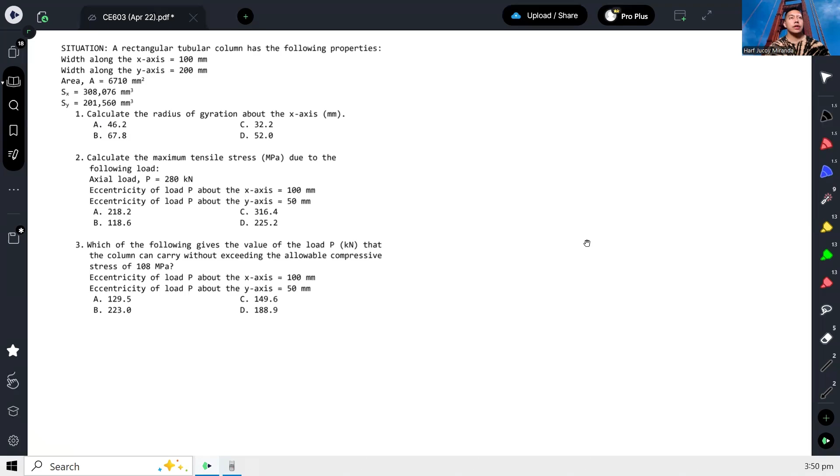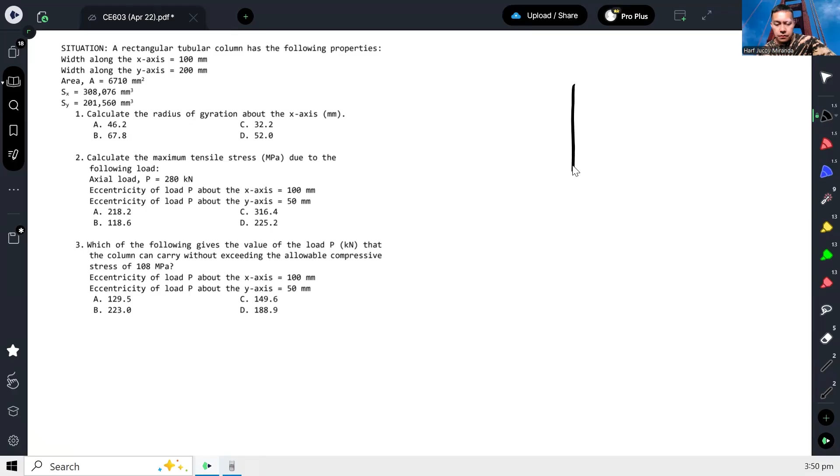For the first question, calculate the radius of gyration about the x-axis. So let's draw the rectangular tubular column. Okay, and let's say this is the x-axis, let's say this is the y-axis.

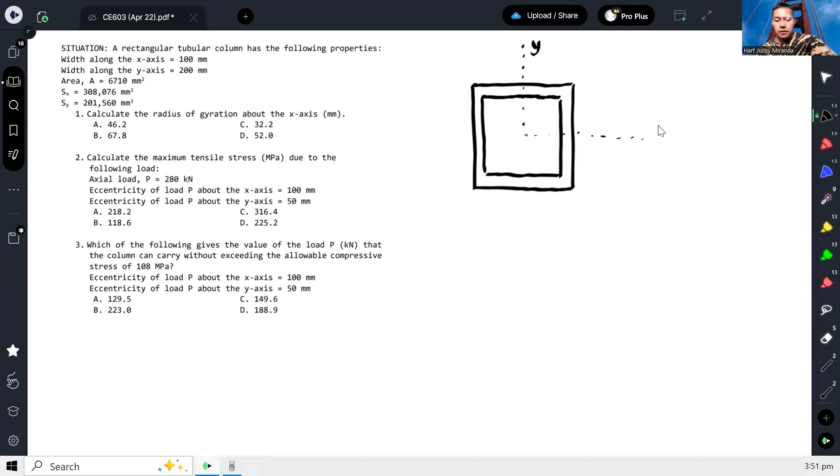The width along the x-axis, so that's 100. Then the width along, take note, along the axis she said - meaning you are measuring it along that axis. So that's 200. Then given naman is the area.

So her first question, what is Rx? Well, of course, Rx is just the square root of Ix over area. There's the area, the problem is, Ix is not given. What's given is the elastic section modulus. The elastic section modulus, it is defined as I over C.

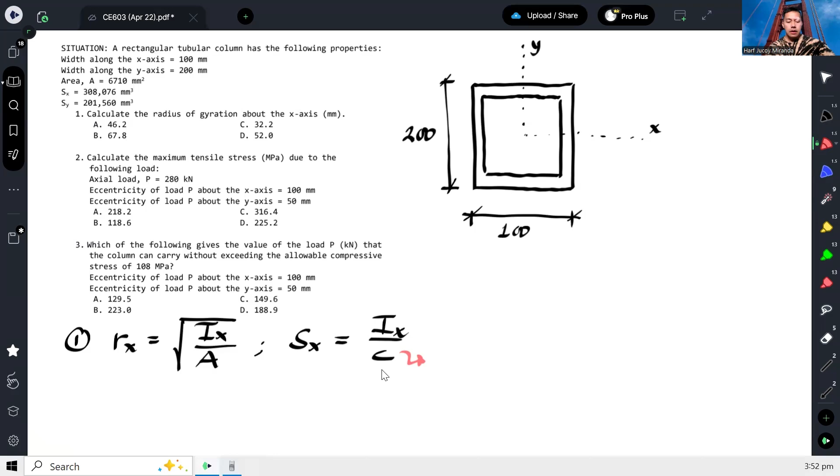So of course, since that's Sx, this is Ix. But what is C? How is C measured? Take note, guys, that C is measured as the extreme fiber distance.

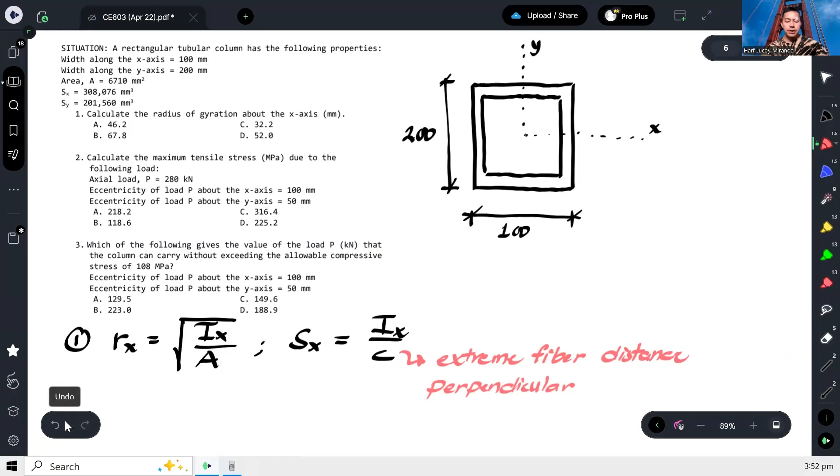Or should I say, measured perpendicular, another way of saying it is extreme fiber distance from the neutral axis. Measured perpendicular from the neutral axis, or from the axis of bending.

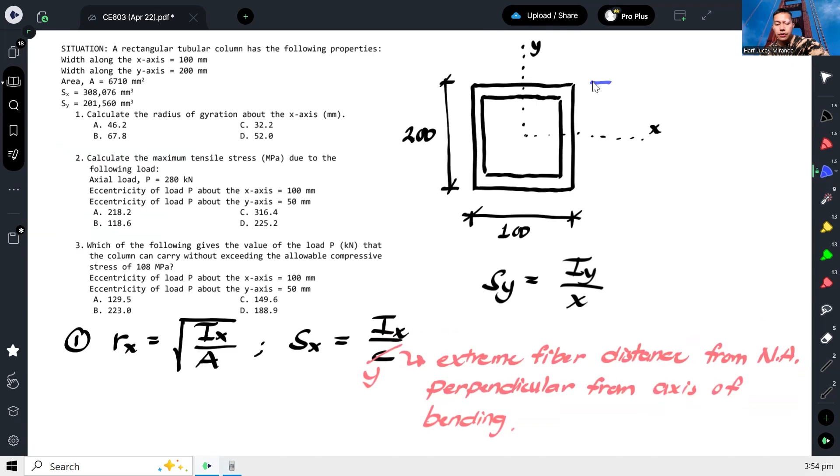So anyway, the Y we're referring to now, since this is rectangular, this is it - that's what becomes our C, which is just 100, half of 200. So therefore, we are now ready to solve for Rx.

So our Rx is just the square root of Sx times Y, which is 100, over area - wait, sorry, it's not divide. What is this? This is Ix. So it's multiply, because we need to cross multiply to get the value for Ix.

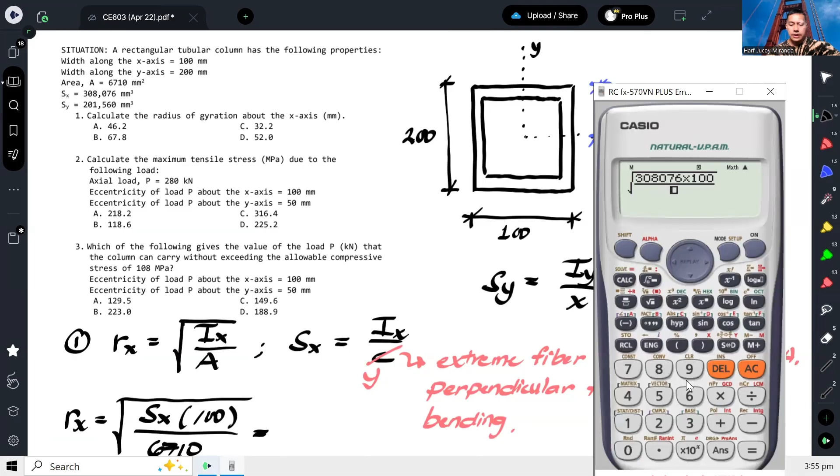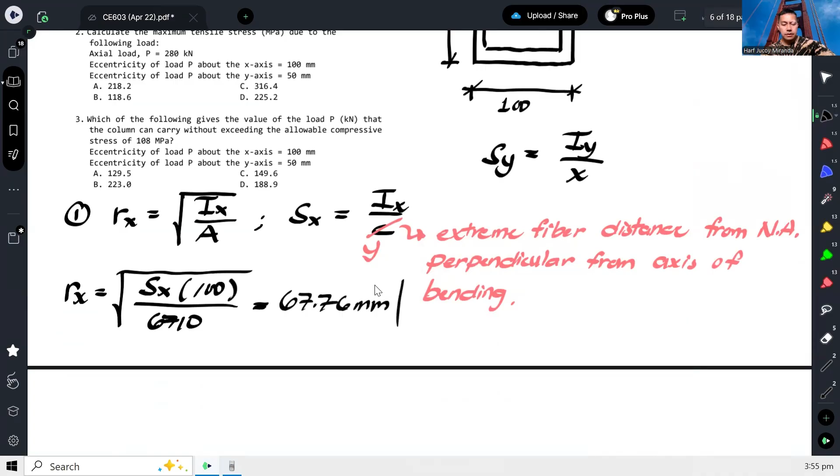So we have square root of 308,076 times 100 over the area, 6710. So that is 67.76 millimeters. And that would be letter B.

Next, calculate the maximum tensile stress due to the following load: axial load of 280 kilonewtons, eccentricity of the load P about the x-axis is 100, and then eccentricity about the y-axis is 50.

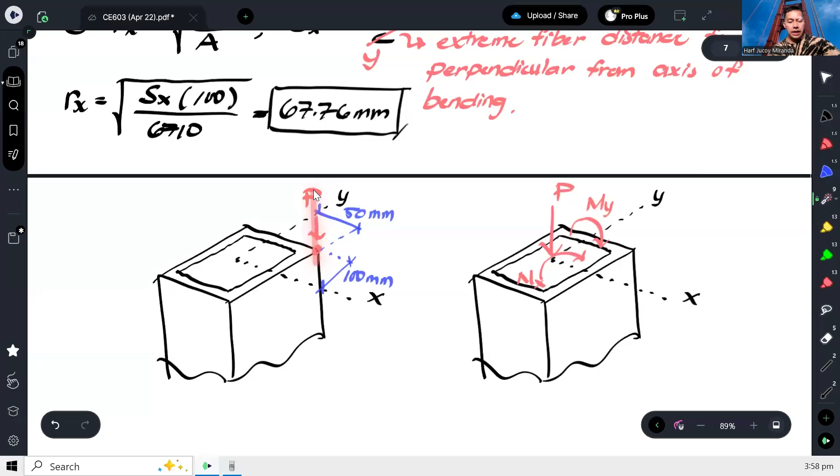So as you can see, on this side, if we just look at Mx, this upper portion will be under compression, while the bottom portion will be under tension. If we just look at the bending moment about y, this right side portion will be under compression - wherever the arrow points, that's the compression side. Then this left side will be under tension. So as you can see, there's a common side where both are tension - this side right here.

Dito, that will be under tension. At of course, alam natin from bending stresses na pinakamalaki yung stress sa pinakamalayong fiber. At ang pinakamalayong fiber, hindi ba ito? Okay, kaya dito, ina-expect natin potentially magkakaroon ng tensile stress, no? So lagyan natin ng note, no? Bali dito is the location of potential.

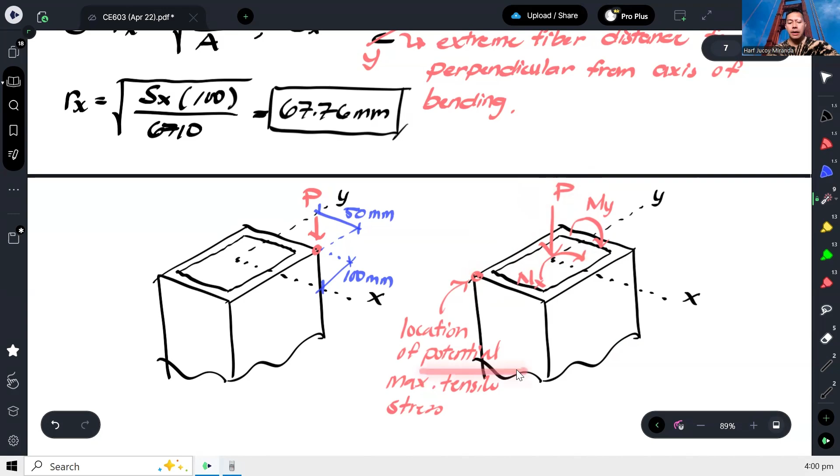Maximum tensile stress. Sinabi ko lang na potential, no? Kasi it is also possible na walang madidevelop na tensile stress. Ibig sabihin, compression pa rin lahat, kasi dahil dito. Pwede kasi na oo, merong effect ng tension tong moment, pero i-combine pa natin yan dito eh, dito na compression. Kaya it is also possible. Kaya sinabi ko lang potential, no? But anyway, so tingnan natin.

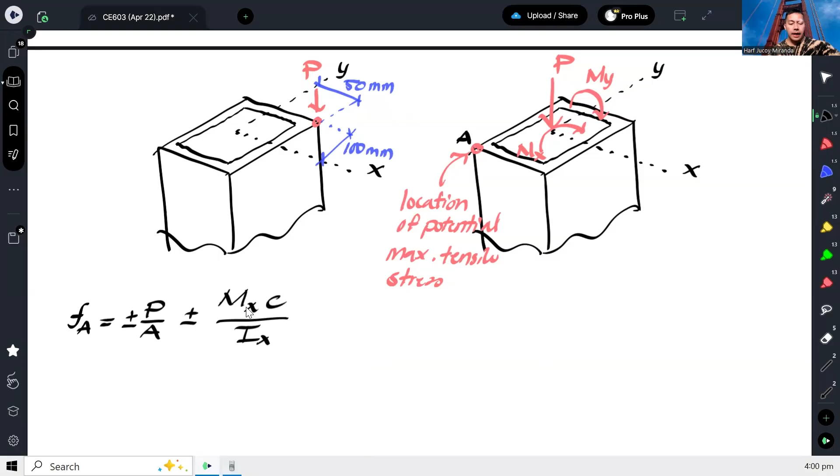So tawagin natin ito na point A. Let's calculate the stress at point A. Dito, of course, gagamit tayo ng combined axial and moment na formula. So that is, sa axial stress, that is P over A plus or minus, tapos meron tayo ngayong MC over I, kaya lang yung M natin dalawa. Meron tayong MX C over IX. Itong C na to, kapag X yung moment, dapat Y yan. Okay? At kapag naman Y yung moment, yung C na to will be X. Na? Diniscuss na natin yung kanina.

Pero, luckily, ang given nga ay elastic section modulus. Kaya instead na MC over I ang gamitin natin, sulat ko muna: MY CX over IX. So instead na yun ang gamitin natin, pwede natin gamitin na M over S. Ayan, pwedeng ganyan. Okay? So again, valid ito only if you are referring to extreme fibers, which is in this case, itong A na to is in the extreme fiber. Kapag hindi yan extreme fiber, hindi mo to pwedeng gamitin. Instead, ang gagamitin mo MC over I, tapos yung C, define mo kung saang fiber siya.

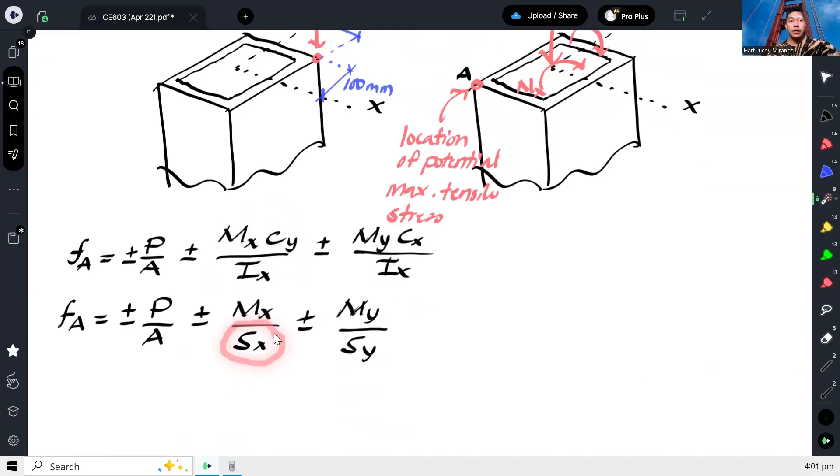For example, itong fiber na to, hindi naman yan extreme fiber dun sa x-axis, kaya meron siyang distance C na hindi maximum. Okay? Kasi ulitin ko lang, itong elastic section modulus ay sinusukat mo yan or kinocompute mo yan based on the extreme fiber location. Kaya nga ito ay C, yan, extreme fiber distance.

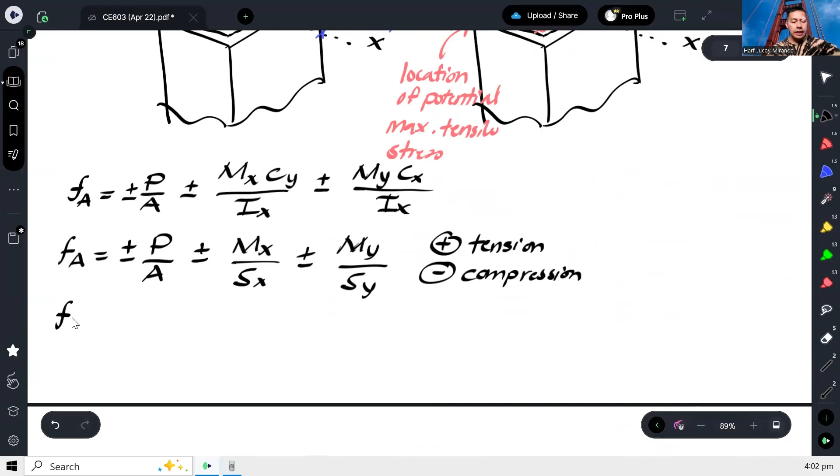Anyway, let's calculate. Ang sign convention po natin dito is kapag positive is tension, negative is compression. Yun yung default na sign convention sa combined axial and bending, so sundin na lang natin. So una, yung P ay compression, so negative. Yung P na in-apply, 280, gawin natin Newton, over area, ang area natin ay 6,710. Okay? Tapos MX over SX.

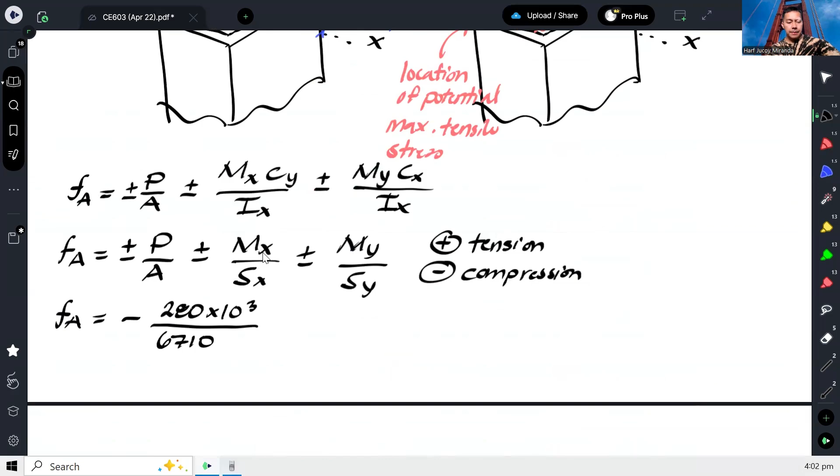So ito, tension naman yung natin. Sa point A, ang effect ng moment about x ay tension, so positive. So MX, paano nga pala kumpitin yung MX? Ang MX ay yung P times yung eccentricity natin along the y or about the x-axis.

Okay, so ang ginamit ko na term along, kaparehas lang din yan sa eccentricity about the x-axis. Pag sinabing along, sinusukat mo siya dun sa axis na yon. So in this case, ito yon. Okay, ito yung 100. So ito yung sinabi sa problem na eccentricity about the x-axis, parehas lang yun sa along the y-axis.

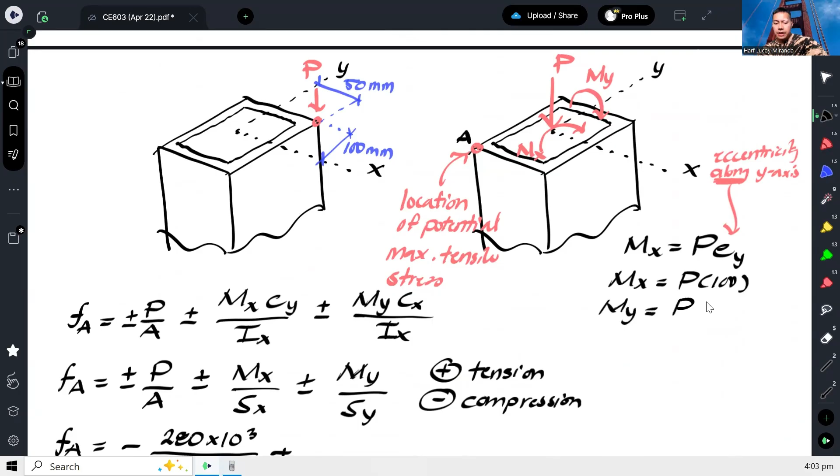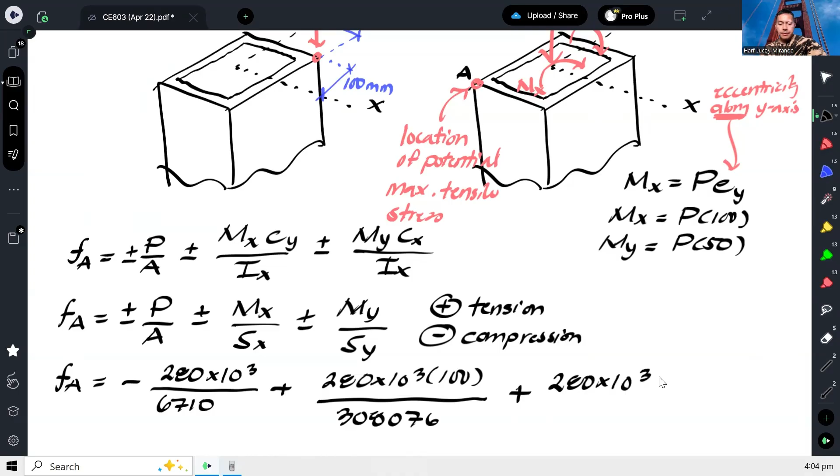Okay, so anyway, that is MX equals P times 100. Tapos yung MY naman is P times 50. We have 280, yun yung P, times 100, moment na yan, no? Over SX. Yung SX natin ay 308076. Okay? And then, para naman doon sa MY, so plus ulit kasi tension, 280 times 50 over SY is 201,560.

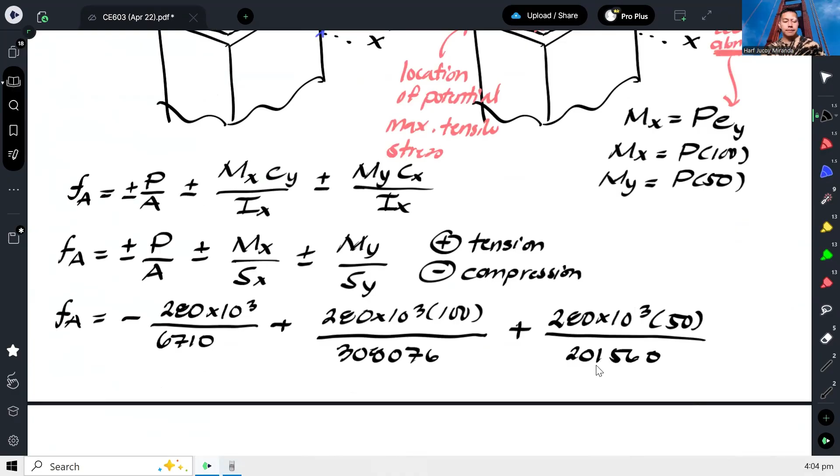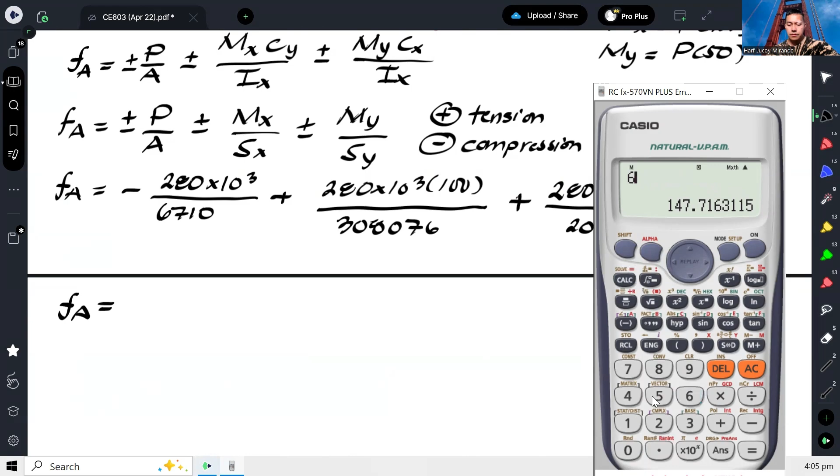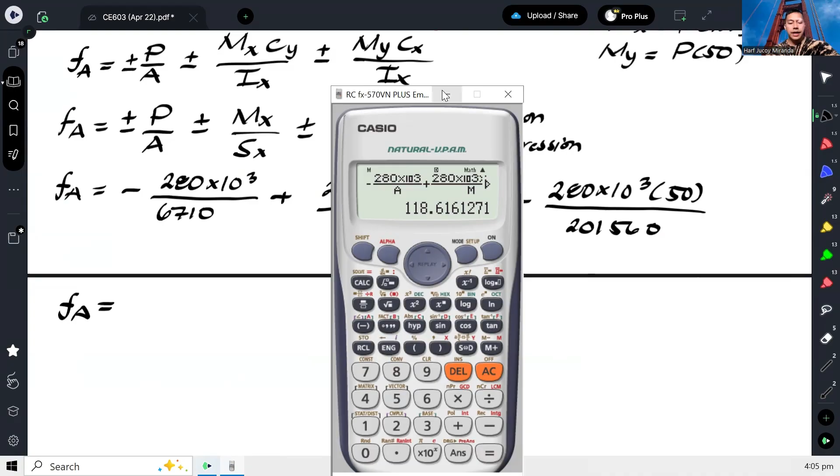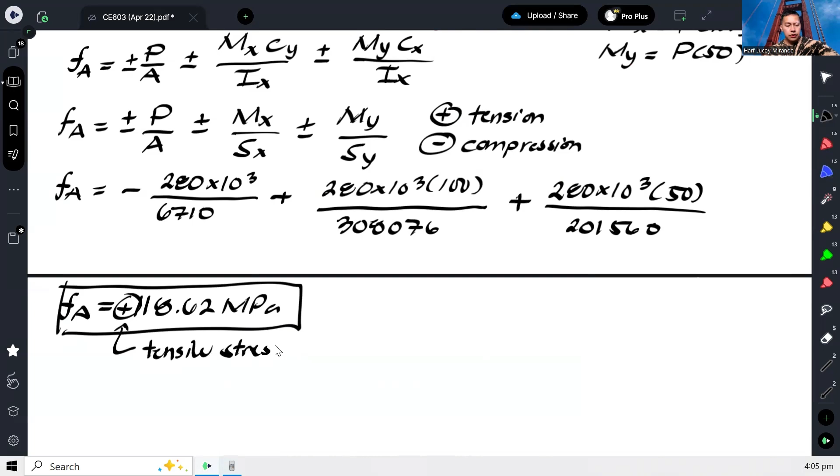Ayan, and let's just calculate. Kapag nag-positive ito, ibig sabihin tension yung stress doon sa A. Kapag nag-negative, ibig sabihin compression pa rin, so in short, walang tensile stress. Okay, and that gives us positive 118.62 megapascals. Positive indicates that this is in tension. So this will be our answer. Okay? So that would be letter B.

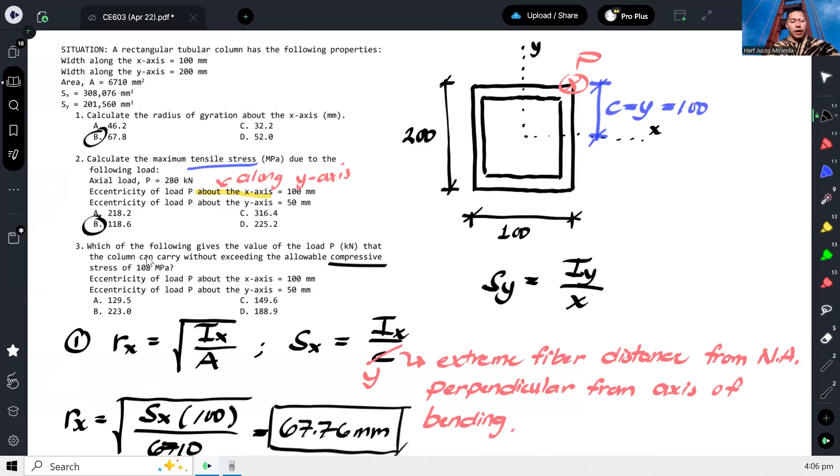Okay, next. Which of the following gives the value of P that the column can carry without exceeding the allowable compressive stress of 100 megapascal? So ngayon, isipin naman natin, saan ba mangyayari yung maximum compressive stress? Actually, opposite lang nung point A. Kasi kung dito nangyari yung tensile stress, dito naman mangyayari yung compressive, maximum compressive. Kasi parehas na effect nung moment dito sa point na to is compression, plus ito pa. So yun yung maximum compressive stress.

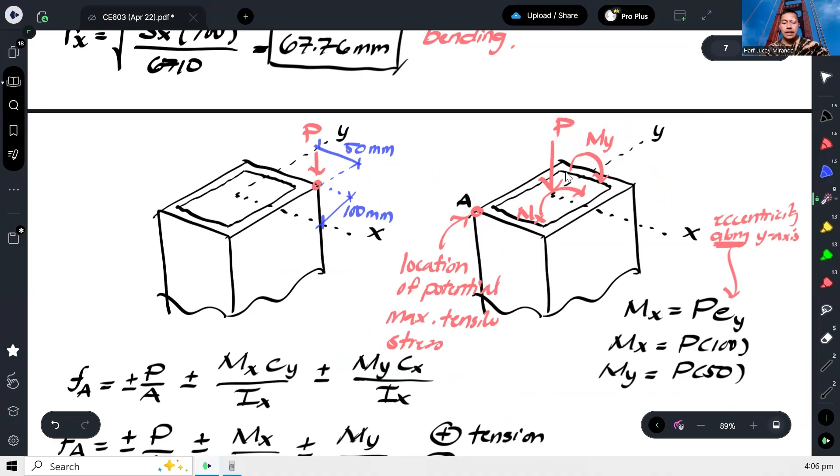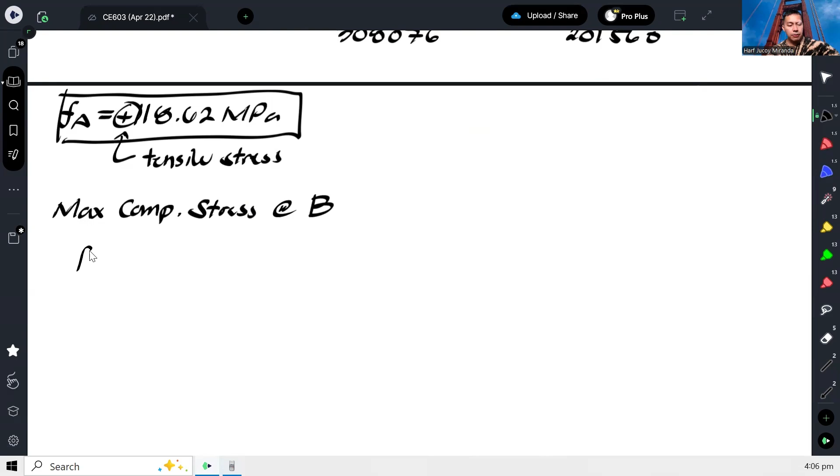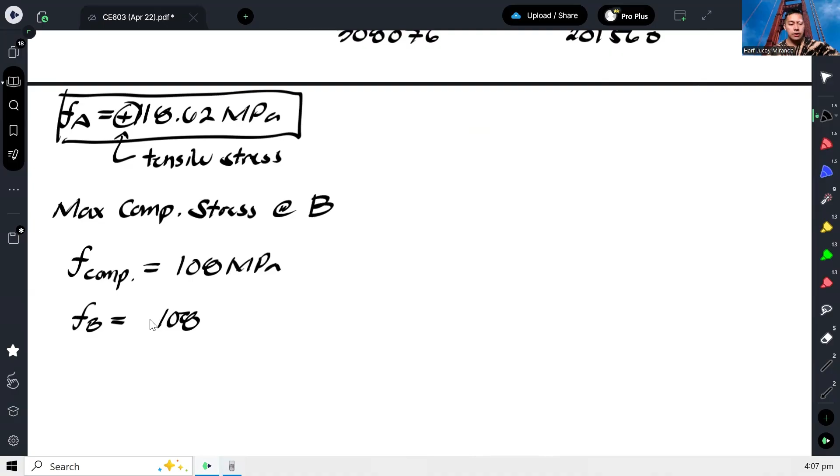So nandito sa point B, no? So max compressive stress is at point B. So ano daw dapat yung minimum na stress or ano yung maximum pala na compressive stress? That is 100 megapascal. Ibig sabihin, isa-set natin na yung stress sa B ay 100 megapascal. Pero take note, no? Compression ito, so gagawin natin negative. Okay? Kasi negative yung compression natin.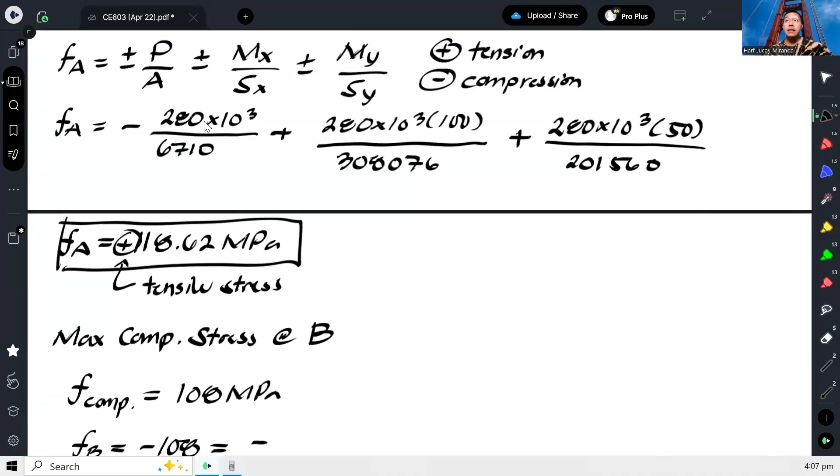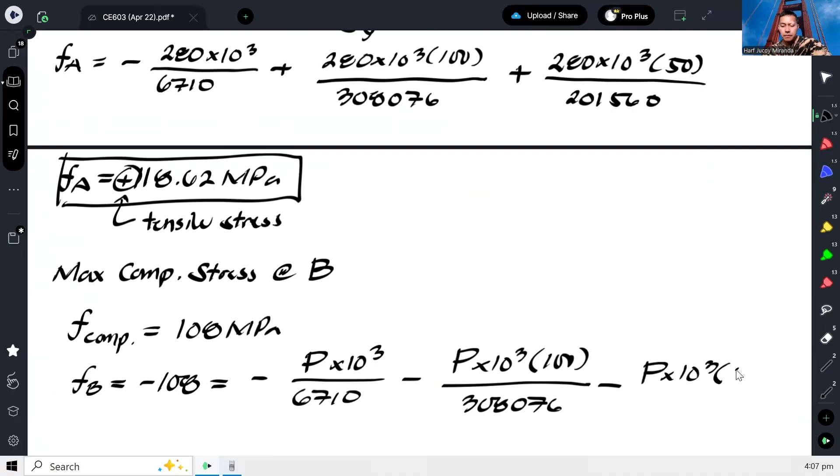Tapos, dun sa formula natin, bali maging ganito lang: negative, tapos unknown na ngayon yung P, no? So bali P over area. Tapos, again, dito sa MX, unknown pa rin yung P, parehas lang na eccentricity over SX. And then, lastly, dito, unknown din yung P over SY. Ayan. And then, all we have to do is solve for P. Okay, and kung mapapansin nyo dyan, magka-cancel lang itong mga negative na to, no? Magiging plus lang yan lahat. Okay? So anyway, let's just solve for P.

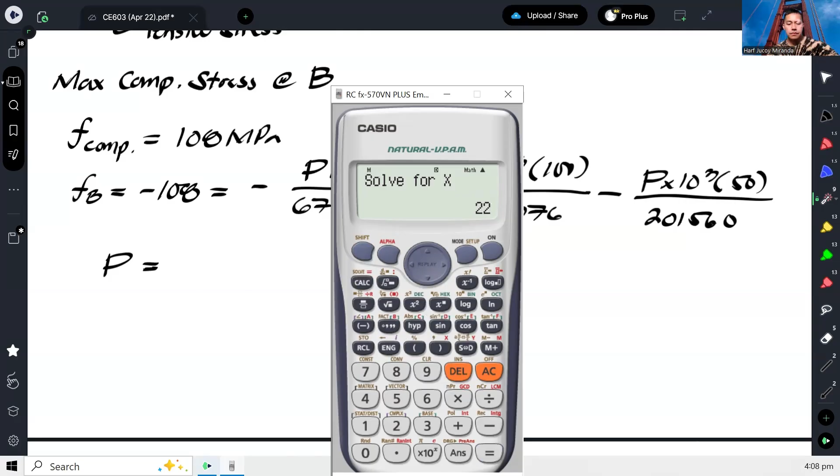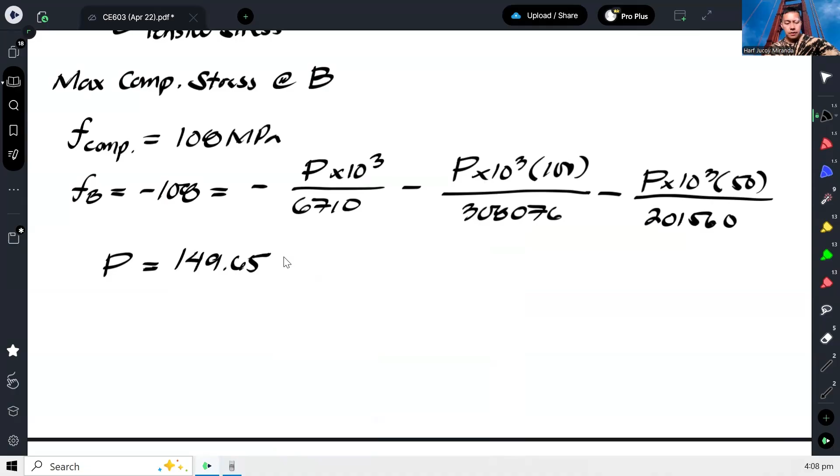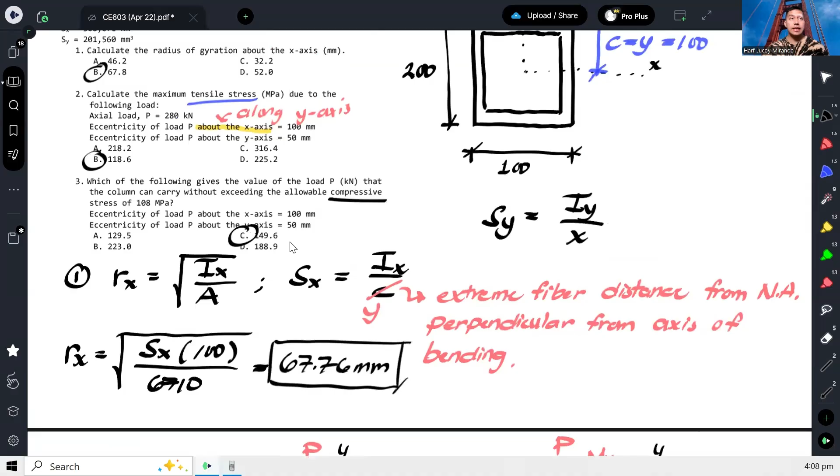Okay, and that gives us 149.65 kilonewtons. So that is the maximum P that the allowable stress, no? Allowable compressive stress is not exceeded. Okay, and that's how we solve this problem.